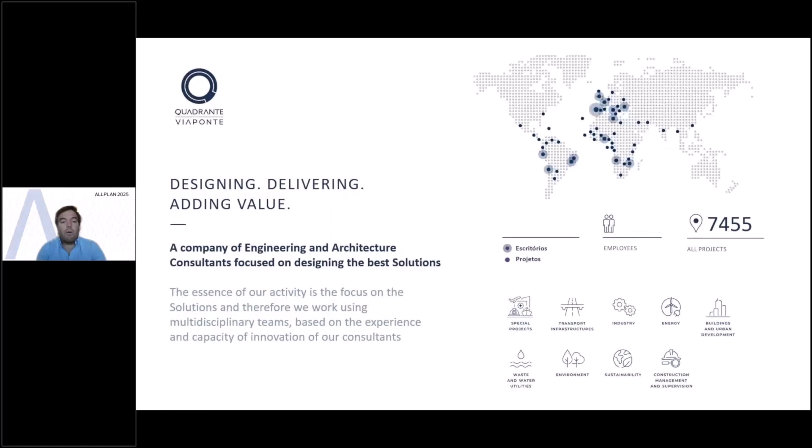Quadrante was founded in 1998 and is a leading engineering company in Portugal. Our main focus is developing architectural, engineering, environment and sustainability projects. We provide our clients with specialized planning, design and project detail services, as well as specialized consulting and advisory services to create or expand large-scale infrastructures. I joined Quadrante in 2017, and it has been an excellent challenge.

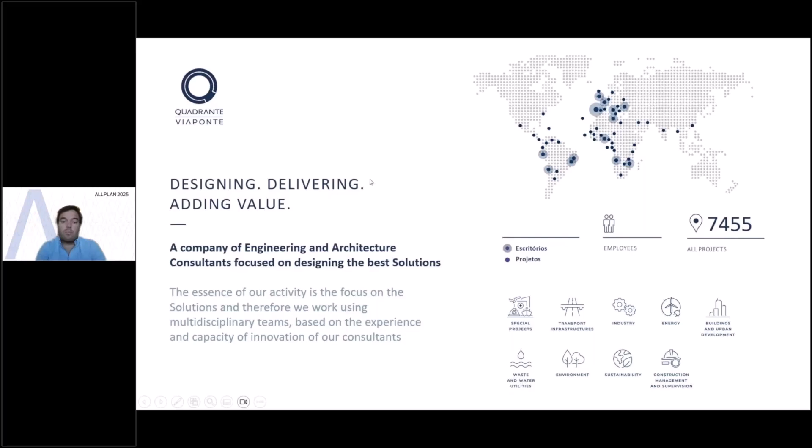Quadrante has many in-house disciplines. It allows me to have a global approach and follow the projects from the initial phase, almost from zero, to the final stage, that is construction. We currently have around 550 employees spread across several locations around the world. It's been a very interesting and rewarding challenge to work for this company in the transport infrastructures area.

In 2021, I was invited to lead the special structures team in Lisbon and Porto. Having been there for years, our team currently has 19 members, and the team develops bridges, viaducts associated with railway lines, metro lines, and also highways and roads.

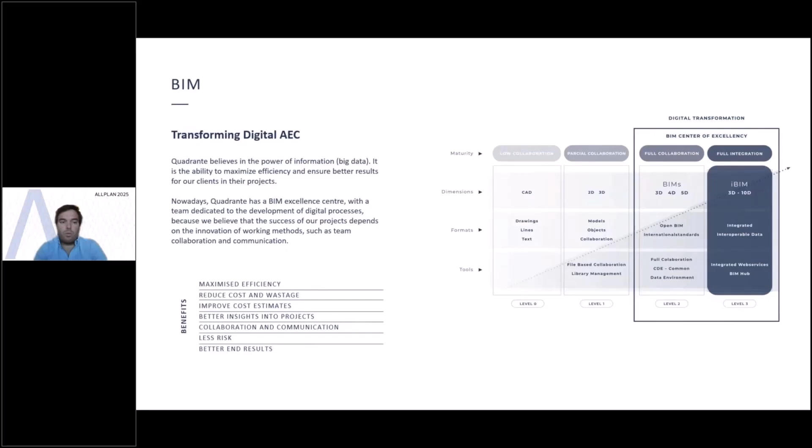Thank you. So for the next question, it would be nice to know how long you have been using Allplan in your company, and also what are the ongoing projects or some interesting past projects you worked on in Allplan.

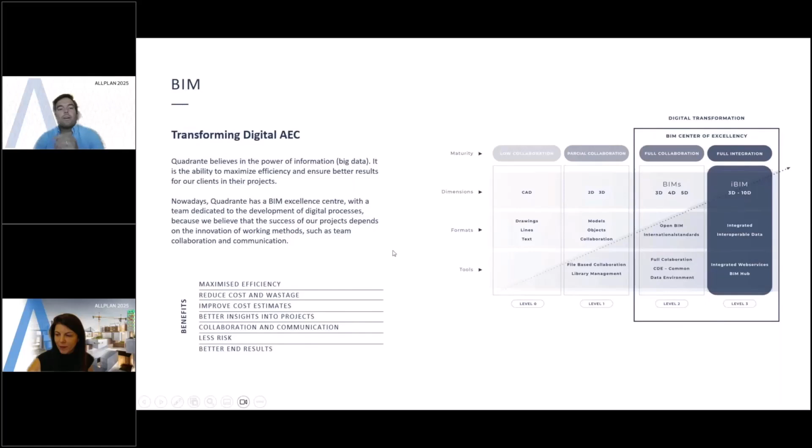Okay. As soon as I started leading the team, we wanted to implement BIM, both because of our company's requirements and the client needs. In bridge design, it's not as common to use BIM as it is in the building sector. Normally bridge models are less regular and have geometry with many curves and variations, and at the time we felt the need to move forward. We did a software benchmark, and of course the winner was Allplan.

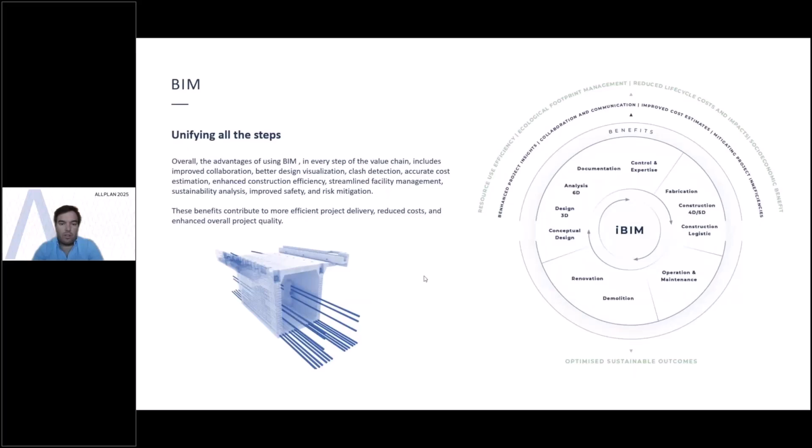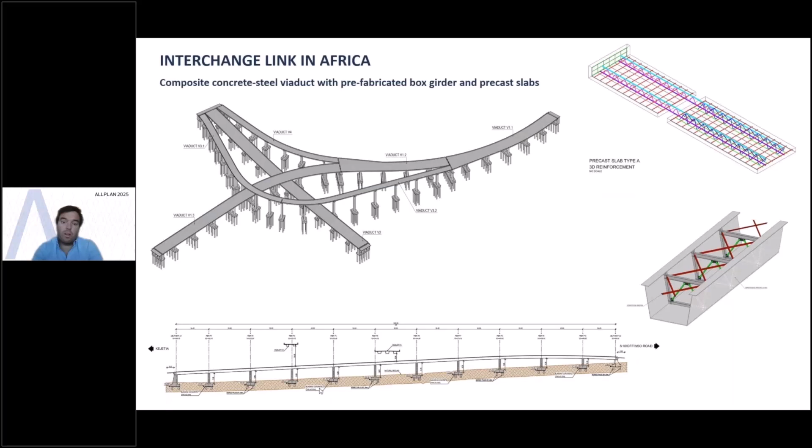We have been using it for about 3 years, and since then we have built some bridges and viaducts, and structures related to underground metro, like stations or tunnels, ventilation shafts, things like that. More recently, we made interchange viaducts with prefabricated steel box girders and precast slabs, shown on the screen. Our work starts from zero, and we did it all in Allplan: rebars, bending schedule, steel drawings, etc.

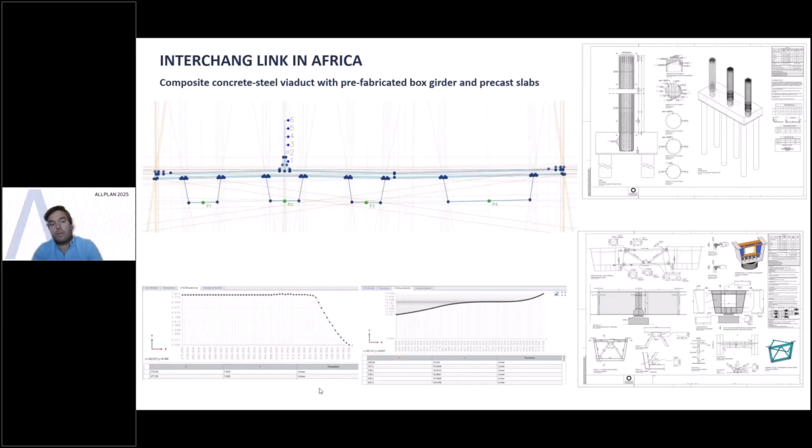In Portugal, we had a project where we designed 7 railway bridges and 17 overpasses with Allplan. In this case, the parameterization was very productive because Allplan reads the road design well and adapts easily to all the bridges. It's not a rigid program.

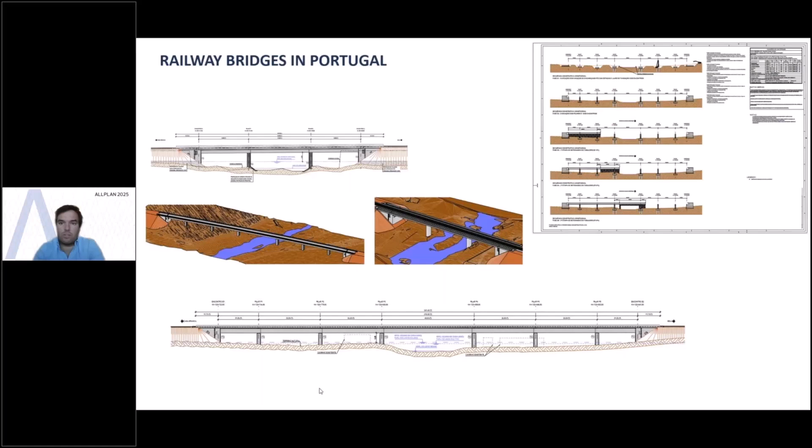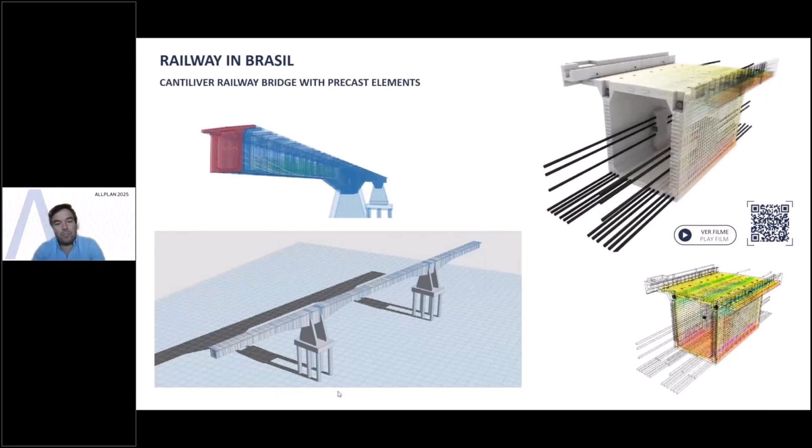Another project, our first project, was in Brazil. We made one of our first bridges, the Rio Araguaia bridge, a 130 meter span box girder bridge with prefabricated segmental elements. We also made the rebars and bending schedules.

Thank you for sharing this. Can you please tell me what do you like about Allplan in general when we talk about the projects?

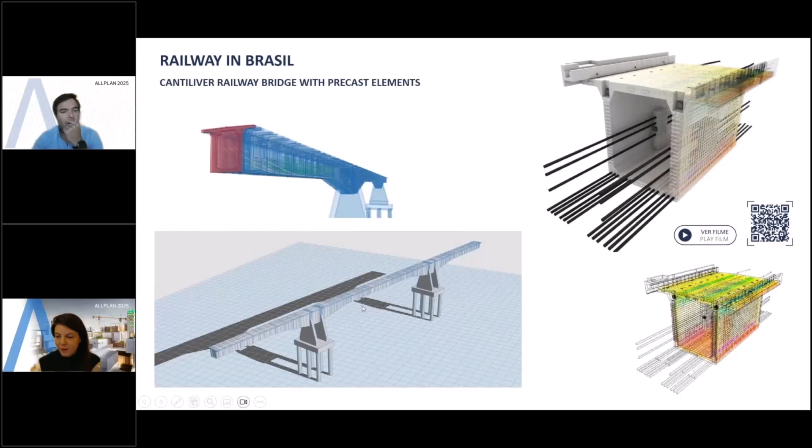Overall, Allplan has a powerful tool, which is Allplan Bridge, now called Civil. This allows you to use road axes and parameterize models in a very simple way, but it's not a rigid thing. The model is very easy to change. There are hundreds of commands, good quality graphics, faster. It's easy to export and import files to other software, and it is an all-in-one program: calculation, 3D models, BIM data, and 2D drawings for construction.

Okay, and with the latest version, you also had the chance to test the 2025 version as a beta tester. Can you tell us what you like the most about this specific version? What are the highlights?

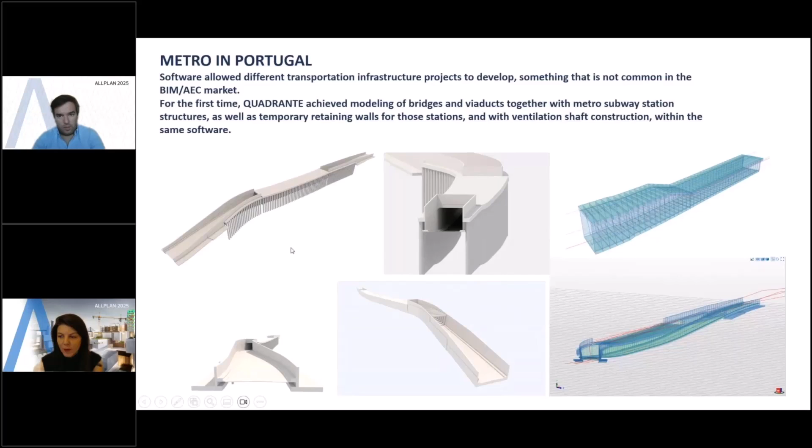What I liked most was the inclusion of more prefabricated element tools. This is interesting because it significantly improves the relationship between the designer and the prefabricator contractor, and it allows us to generate export spreadsheets and things like that. There are now also more parameters available related to materials, which gives greater rigor and quality to our projects.

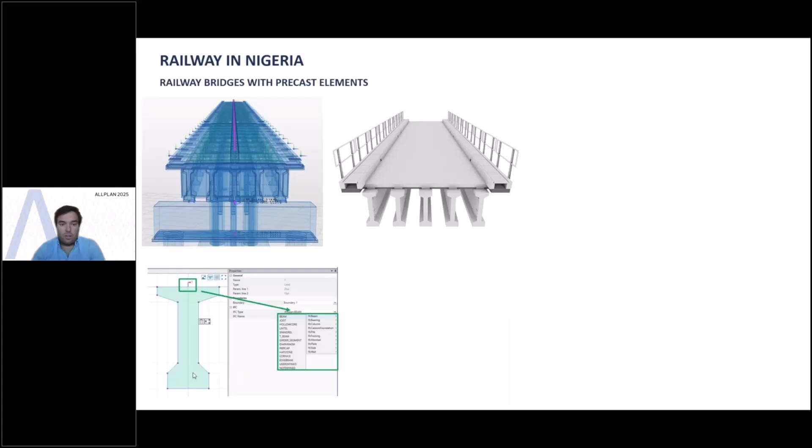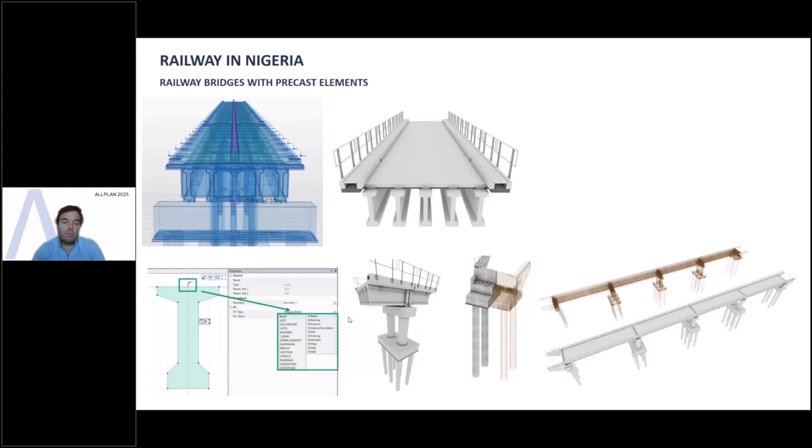For example, in our Nigeria project, a large-scale railway project, with prefabrication tools it was possible to achieve efficient production. This project has many bridges, and due to the similar elements, it was possible to complete it in a short time and with simple methods.

Okay, and what would you sum up for the end, as we are approaching the end of the interview, in which way Allplan 2025 or Allplan Civil can enhance your workflow until now?

In addition to the new prefabricated element tools, I can mention some aspects that will help us do a better project, such as the construction phasing, which is well present, and there are now many options for the construction schedule, which is quite interesting. Also, the creation of more localized visualizers and improvements in graphical aspects is a very positive update, and the visibility of the tree menu is now more intuitive and faster. I think that's all.